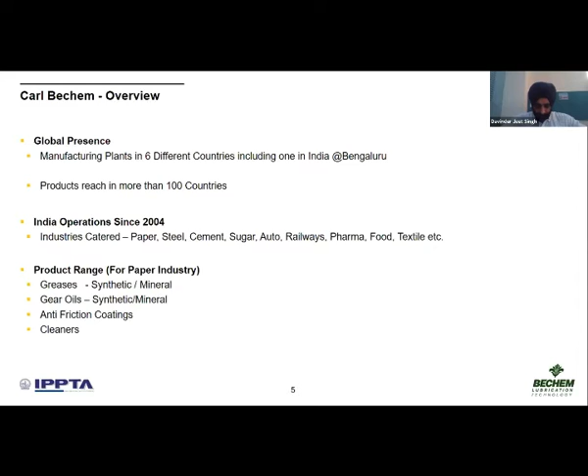The advantage of having Bechem in the plant is that it's German technology made with special German formulations. The additives are all imported, but it's made in Bangalore, sir, at an ISO IATF plant.

We have a pan-India sales network, as you just spoke to one of our distributors. We have distributors located all across India in strategic locations, and trained application engineers. It's not that someone has to come to your plant from a very far away location - generally we have people locally available who can cover the entire movement pan-India.

We strongly believe that there is a tailor-made solution to every industrial problem in the plant.

Our approach, we strongly believe in application engineering, sir. The application engineers conduct lube audits at your plant, which lead to meticulous selection of lubricant, optimizing consumption - right lubricant, right quantity, and right interval. That is the key to any solution in the industry, and it surely helps minimize downtime and optimize the production.

We have a very wide range of greases, around 600 types, so generally we don't have to customize any grease. We'll have a solution for whatever problem you have, with local inventory and timely delivery.

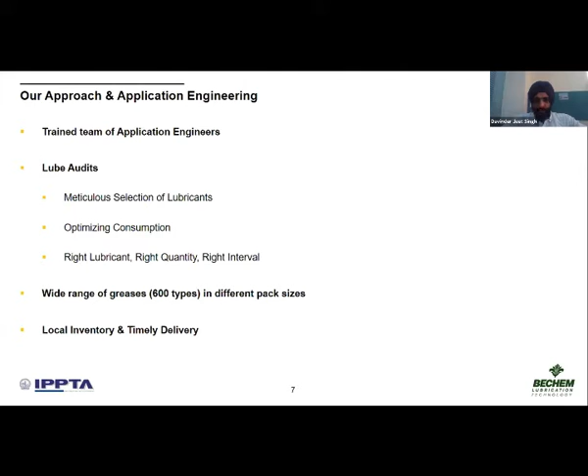Just to give you a brief - sir was mentioning about the moving components in the paper and pulp industry. We have products already selected for most of the applications - water resistant greases, high temperature, heavy load, high speed greases. Anything you need, you will find in the Bechem portfolio.

Just a few glimpses of our plant in Bangalore, sir. We have various lines in Bangalore - lithium, aluminium, urea greases, water miscible. We also have cutting oils and gear oils. If you see the plant, you can observe how the barrels are stacked.

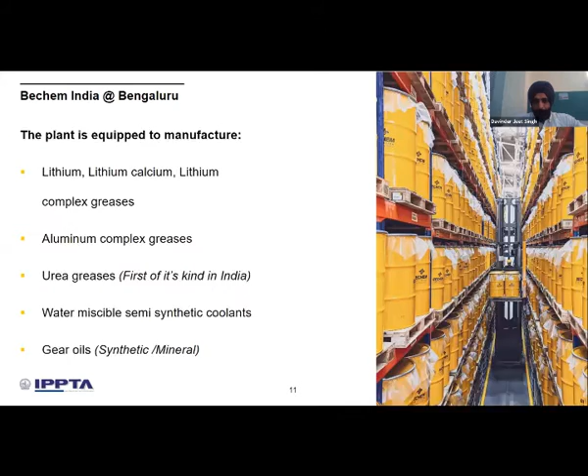Mr. Devinder, nothing is visible to us. Because Hari, sir, you are not sharing the screen or something. No, Hari, we are on the screen of Mr. Harihara and you are speaking. Sir, the same screen - are you not able to see? I'm not able to see, sir. It's very much visible, I can see, sir. Okay, fair enough, please go ahead then.

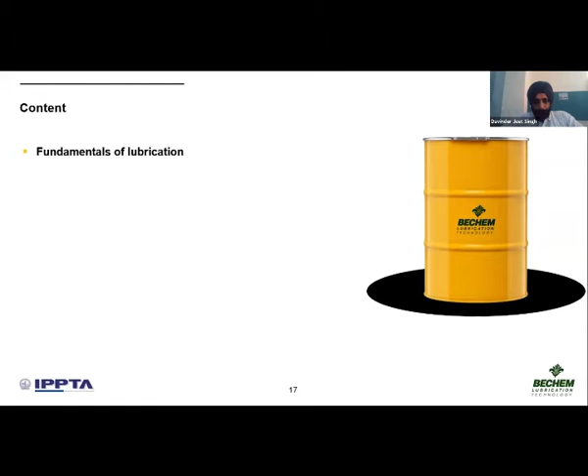So finally we come to the real technical session, and I would take you to the content. That's the yellow gold, as we say. We'll be talking about fundamentals of lubrication, key test methods for greases, and the lubrication practices, whatever we have understood, sir.

Synthetic versus mineral, it's a big debate and probably too small a time today, but we'll give you certain advantages and limitations of both. We have certain case studies, sir - we'll share our experience and probably learn from your comments and views. And the application, other important application areas in the processing plant.

Now I would request sir Mr. Hari to come in with the technical session. We'll begin with fundamentals of lubrication. You have seen he has a very vast experience and he'll probably take us through the fundamentals of lubrication. Hari sir, please. Thank you, Devinder.

Am I audible? Yeah. Thank you, Devinder. Thank you, Goel sir, for this wonderful opportunity, and all the office bearers of IPPTA for making Carl Bechem being associated with you.

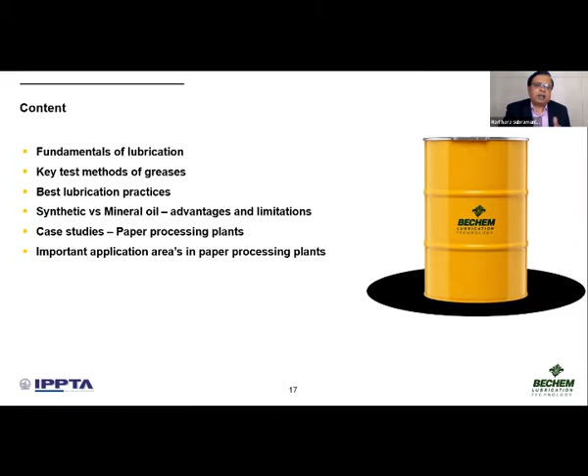Let me begin our presentation on the important fundamental aspects. All of us should know that at any point in time, there are about 50 billion bearings running around the world. In fact, they are the most widespread machine elements in the industry after nuts and bolts. No wonder so many of you experts have joined this technical session on important aspects of lubrication.

Any discussion on lubrication engineering starts with a focused discussion on friction, more specifically about coefficient of friction. Of course, friction is beneficial on many occasions, like brakes, for example. Since we are in the maintenance industry, where we have to take the maximum life of machine parts like bearings, chains, gears, etc., our job is to keep the friction as low as possible. Why? The obvious reason is material loss, wear.

For example, I am holding a ball bearing in my hand. If I don't lubricate it properly, we all know that it will fail in a very short while. But perhaps the most neglected reason for keeping friction as low as possible is the energy losses. I'll use coefficient of friction and COF interchangeably. If the COF is quite high, you will need a larger force to drive this bearing to make it rotate. And that means I am going to lose a lot on energy. So the main reason for reducing friction is to control the material loss and the energy loss.

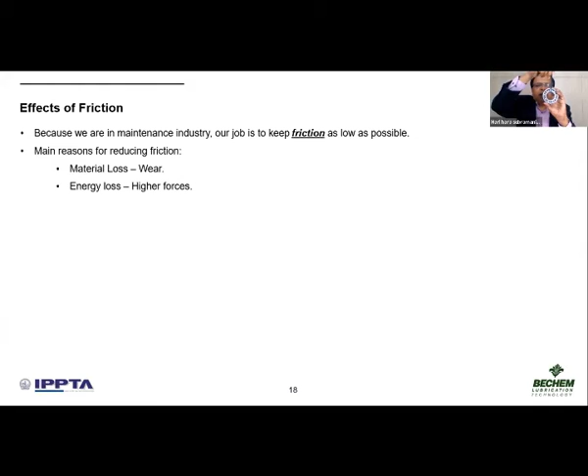Number two, let us assume that I am actually loading this bearing radially in this direction. If there is a pure radial load here, the actual load distribution in a bearing will happen in an arc of about 150 degrees, which means the rolling elements will enter the load zone, participate in the load zone, and then leave the load zone as the bearing is rotating. So kindly remember the second point. Whenever I mention contact zone, it actually means the load zone in the bearing.

Now we will discuss the three main aspects of friction. Please remember, the coefficient of friction in a bearing actually depends on the bearing type and also the size, as well as the speed, load, the quality of lubricant used inside, and the quantity of lubricant used inside. All this will influence the coefficient of friction.

If you take the machinery designer's perspective, as a general rule, they will consider a constant coefficient of friction of 0.0015 for a ball bearing, for example, and for a cylindrical roller bearing, a COF of 0.0011. Even though a cylindrical roller bearing has a line contact, it has a lesser coefficient of friction because of its construction. Similarly, a spherical roller bearing will have a constant coefficient of friction of 0.0018. This is what the machine designer will consider.

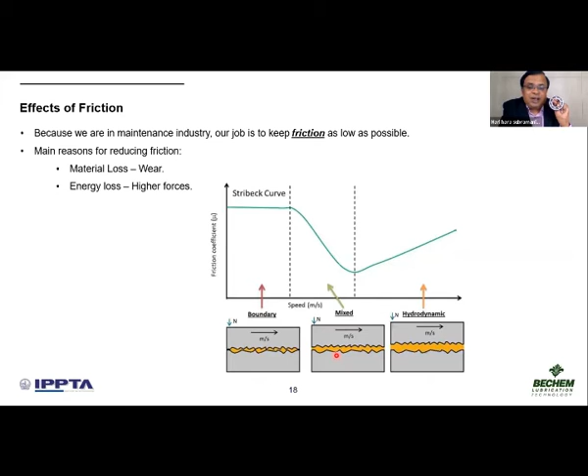Now, why should I know about the mixed friction zone? Any bearing or gears that you see in your industry, where the bearing or the gear has an oscillating motion, which means it begins to pick up speed, the bearing again stops, reverses direction, again starts the rotation, again stops. So this kind of oscillating motion will typically work in the zone of mixed friction. Here again, the lubricant would have successfully formed a lubrication film, but still not sufficient enough to completely separate the friction partners.

Now, as we saw in the Stribeck curve, the primary lubricant role is to separate the friction partners by forming a lubrication film. In the previous slide, we saw the types of friction. Here, we will see the types of lubrication. Please note that the separation of friction partners and load transmission through this lubricating film, for example, in this bearing, happens through a film thickness of about 1.3 microns. Can you believe it? This is almost 23 times lesser than a single human hair. So actually, you cannot see this with your naked eye.

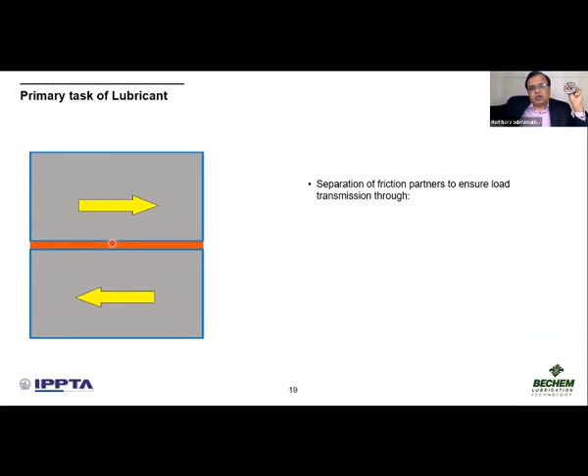And this bearing actually is a 6208 bearing. And this bearing has a dynamic load carrying capacity of almost 3,300 kilograms. So can you imagine the load transmission is actually taking place through just a 1.3 micron thick film, and as large a load as around 3,300 kgs. This is happening through what is called a hydrodynamic film. By hydro, it means oil or fluid, and dynamic because the friction partners are in motion.

We should also understand what is an elasto-hydrodynamic lubrication film. The word elasto only is added here. Due to the tremendous pressure on this 1.5 micron or 1.3 micron thick film, what happens is the balls, when they enter the load zone, they actually elastically deform. Not only the balls, the lubrication film itself, the outer raceway contact zone, inner raceway contact zone, all of them elastically deform until such time they stay in the load zone or contact zone, and then they come back to their normal shape.

In fact, you can assume that the balls will take the shape of an ellipsoid, for example, the shape of an egg in the load zone before it comes out of it. That elastic deformation and the lubrication under that condition is called elasto-hydrodynamic lubrication. All bearings, all gear tooth flanks, cams, all of them are subjected to this phenomenon called elasto-hydrodynamic lubrication film.

In the Stribeck curve, we saw in the boundary friction zone and the mixed friction zone, the lubricant would not have completely separated the friction partners. In that case, additives added to the lubricant have to form a chemically reactive layer on the asperities, which will control friction and wear. So those three are the types of lubrication film that we encounter. So that was the primary task of a lubricant.

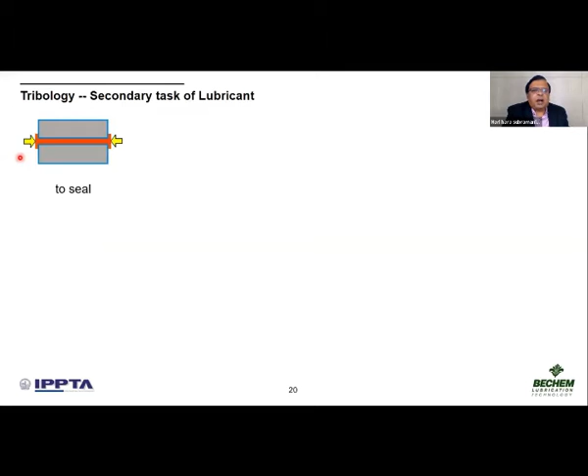What are the secondary tasks? In a paper plant, paper pulp, water, chemicals are very common contaminants. No matter how effective the sealing of the bearing is, these contaminants will somehow find their way through the narrow holes in the sealing system. This contamination is one of the strongest reasons for bearing failure. So not only does the lubricant have to provide a lubricating film, it also has to seal the lubricated part from the harmful influence of these contaminants.

High temperatures, typically in excess of 100 degrees centigrade, will be found in paper plants. Of course, the process-related temperature, like for example, steam used for curing or hot air used for blowing on top of the coating on the paper, these cannot be controlled. Those are proper process parameters. But what can be controlled is the friction-related heat generation inside the bearing. So how efficiently the lubricant can dissipate this friction-generated heat, that means to cool the lubricated area, is a very critical secondary role of a lubricant.

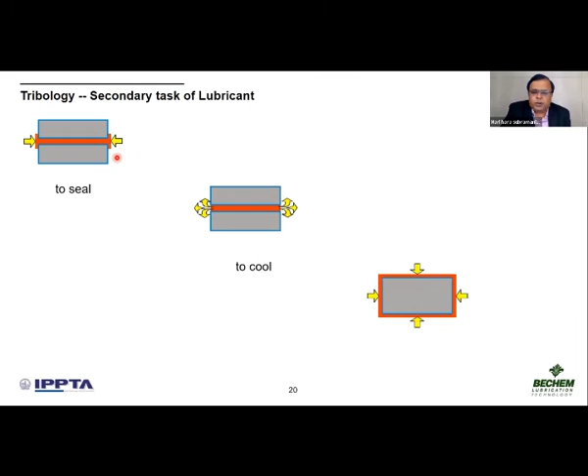Highly acidic and alkaline chemicals, water, solvents are all commonly used in paper plants. And these kinds of contaminants have a very destructive relationship to bearings, in the sense they corrode the bearing and reduce their lifetime. The lubricant actually should act as a shield and protect this lubricated part from corrosion. So those are the secondary tasks of lubrication.

Now, what are the options available for me to lubricate a component? The first obvious option is a grease. As Davinder was mentioning, 600 different grease formulations only in Bechem. In fact, I find it funny when some of my customers say, I have used a very dark purple color grease in my experience, and that grease gave me phenomenal results; probably that customer was not aware. Color in the grease is actually given maybe for identification purposes, and it is basically a dye, maybe for cosmetic reasons. And the second popular option is oils.

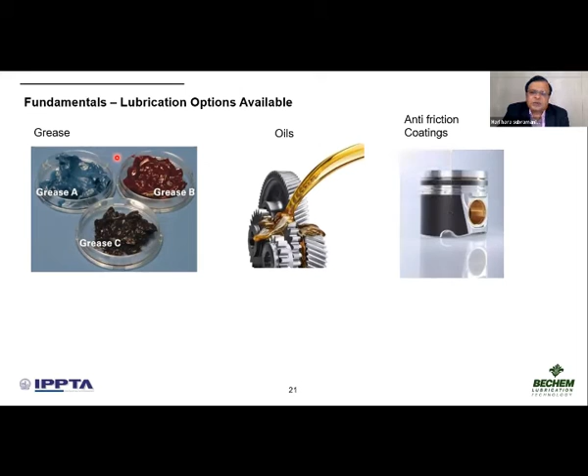For example, gearboxes, hydraulic systems, compressors, engines, transmission gears, all of them are very comfortably and successfully lubricated with oils. There is a marvel technology available, especially for sliding surfaces, not for rotating elements like bearings, called anti-friction coatings. We all know that grease and oil will remain wet throughout their lifetime. But these coatings are liquid while applying, but once they cure, they form a dry film, and this dry film gives lifetime lubrication over a very wide temperature range.

And the fourth and final option available for lubrication is a lubricating paste, especially for fasteners which are exposed to high temperature, for example, the flanges of a boiler. And the second is fasteners which are exposed to a highly corrosive atmosphere.

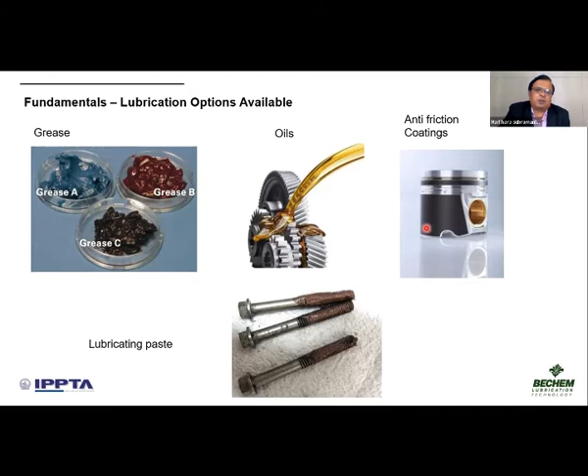Now let us discuss the constituents of grease. Even though the grease looks like a semi-solid substance, 85% of the constituents of a grease is oil. This oil is actually what forms the lubricating film in the bearing. Now, this large quantity of oil is thickened by means of a thickener, which is up to about 10%. The role of a thickener can be assumed like a sponge. When you take a piece of sponge and dip it in oil, it will absorb the oil in its structure, and when it is squeezed under load, it will release the oil for lubrication. So absorption and releasing is the role of the thickener. Not only that, it also helps to retain the oil and the additive package in the applied area.

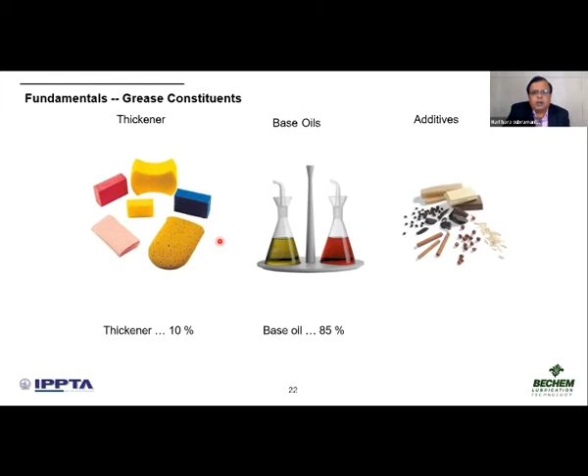Now, the thickener actually determines many performance parameters of the grease. For example, its consistency, its operating temperature range, oil bleeding properties, water resistance properties, and several other parameters are directly influenced by the thickener. Additives are certain chemicals which are added to boost the performance of a grease.

Now, coming to paste, the only difference between paste and a grease is the quantity of oil in the paste is drastically reduced, up to 50%, and about 40% of solid lubricating additives are used. For example, graphite or MoS2 or copper for high temperature applications. So we should understand in a paste, the base oil is actually used as a carrier to deliver the solid lubricants to the required area, like threads of the fasteners, for example.

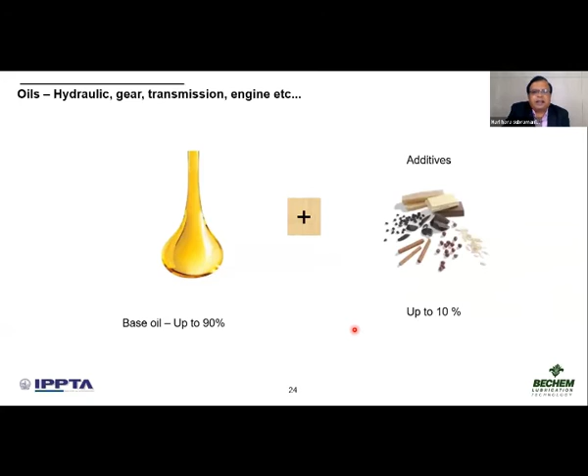Now, in the case of an oil, it is simply the base oil and a host of additives added to it. Now, coming to base oil types, the first popular one is mineral base oil. Especially in India, when we say 20W40 or SAE 90 oil, we mean mineral oil with specific performance properties. They are actually manufactured by refining and hydro-treating crude oils, which are taken from the earth.

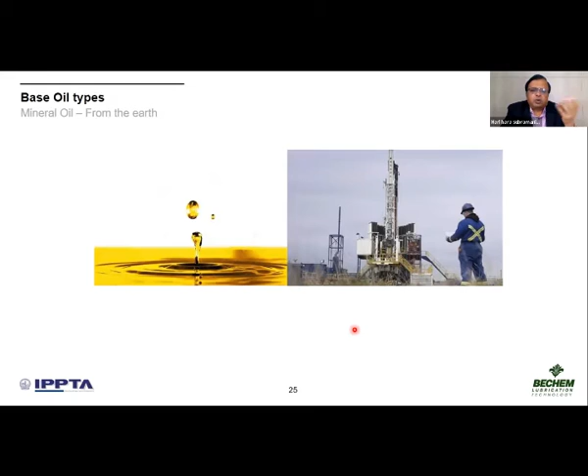Please remember, when I refine the crude oil, a mix of mineral oil comes out. It's never a single quality. For example, naphthenic, paraffinic, olefinic, aromatics, several mixes of mineral oils come out from crude oil. And these raffinates are refined and made more and more pure, for example, by removing waxes, by removing aromatics, by removing sulfur, etc., so that they become a candidate for use in lubricant formulation.

Now, the second variety of oils is synthetic oil. In that, a very popular one is called synthetic polyalphaolefin, which is also called PAO, also referred to in the industry as synthetic hydrocarbon because of the hydrocarbon structure in its backbone. And this oil is very popular, in fact, in the paper industry. For example, in modern paper machines where dryer sections are lubricated with recirculating oil for bearings, the recommendation comes from the OEM for polyalphaolefin oil because of their exceptional oxidation stability. You need not change this oil for some 5 years of running.

They also have a very low traction coefficient, which means the lubricant's internal friction is so low that if they are used in, for example, the gearbox of the paper machine drive rollers, they can result in reduced heat generation of the gearboxes as well as save energy. There are many other synthetic oil types. For example, do you know that all high temperature chain oils are actually formulated with synthetic esters? Polyglycols are another very special type of synthetic oil which has inherent extreme pressure properties. This property is extremely useful, for example, in worm reduction gearboxes, where the sliding percentage is as high as 90%.

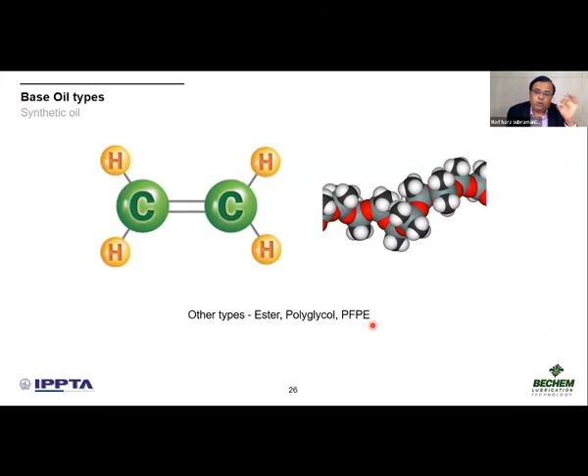And the costliest synthetic oil in the industry is PFPE. This oil is completely inert. No chemical can affect this oil. Not only that, it has some super advantages like super high temperature resistance, radiation resistance, etc. In fact, one of the times when we have celebration among our team is when my team makes our customers realize the properties of PFPE oil and proves the cost-benefit performance of such expensive synthetic oils.

Now coming to the second constituent in a grease, which is the thickener. The most popular is the lithium thickener, which was developed somewhere in the 1930s. The thickener microstructure looks like fibers like this. It is also called lithium soap because the thickener is prepared by a saponification reaction. Now, the thickener we saw will keep the base oil in its structure. This typically happens with the help of van der Waals forces and capillary forces.

There are many other types of metal soap thickeners like aluminum and barium, for example. And if you complex the simple soap thickener with a salt, we call it a complex soap thickener, which is good for structural and temperature resistance. Please remember the fiber length of these thickeners will be between 1 micron and about 100 microns, with a length to diameter ratio between 10 and 100.

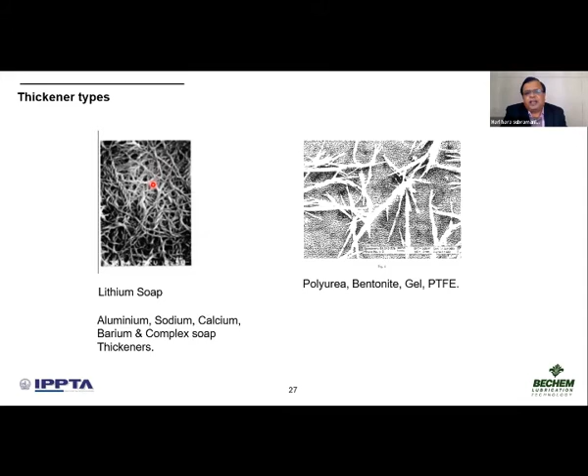In about the 1980s, another family of thickeners was developed, called non-soap thickeners. Popular among them is polyurea. Apart from its several advantages like very good water resistance and high temperature resistance, one unique advantage of polyurea that I would like to highlight here is that it leaves the least amount of residues after its useful lifetime, which means when I apply fresh grease for relubrication in this bearing, almost all the relubrication grease will reach the load zone because the bearing carries the least amount of residues. That is why this thickener technology is becoming very, very popular, especially in the paper industry.

Now, as I was mentioning, there is a host of additives that are added to lubricants, be it oils, greases, or pastes. The primary purpose of adding additives is to eliminate certain undesired properties of the base oil, for example, very high pour point, very poor oxidation stability, or to add additional properties to the base oil, for example, increase its load absorbing capacity, or boost its existing properties like corrosion protection, adhesion, and so on. There are many types of additives, oxidation inhibitors, pour point depressants, and so on. I will focus here on solid lubricants, which are very popular for bearing greases, especially for very moderate or low loads.

Microfine plastic powders called PTFE powders are added as additives to grease, and for medium to very heavy loads, solid lubricating additives like graphite and MoS2 are used in grease formulations. Please remember, the additive content is as low as, let us say, 5% or 3% in many cases.

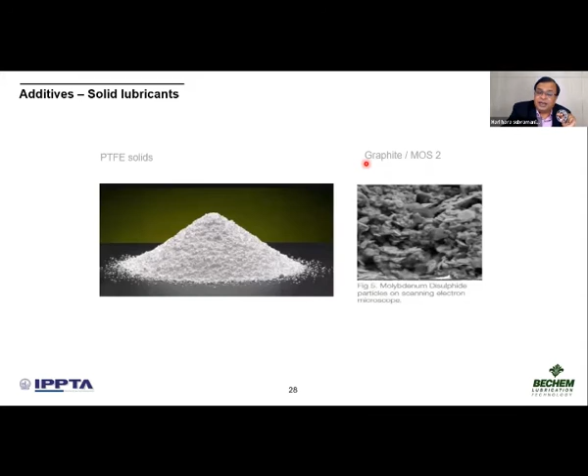Now, moving on to my next section, there are several test parameters that are used to evaluate the quality of greases. In fact, if some of you are fortunate enough to visit the advanced laboratory that we have in Bangalore, you will see hundreds of equipments that are used in testing various type of lubricant formulations. But here I would like to touch upon two very important tests which are relevant to the paper industry.

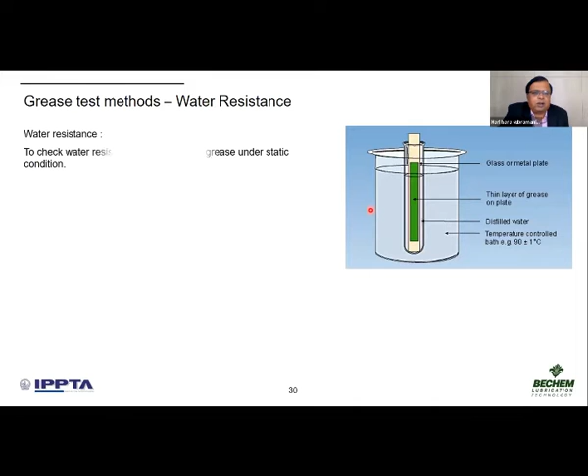The first test is the static water resistance test, which is used for determining the emulsification resistance property of a grease. In this test, a thin glass plate is taken and a thin film of grease is spread on the glass by means of a metal template. This is then put into a test tube and exposed to the test water and also to a heating atmosphere. Typically, here again, water is used. Now, the thickness of the grease film, the cleanliness of the glass surface, the dimensions of the test tube are all specified as per the DIN 51807 standards.

After exposing this to the water for about 3 hours at 90 degrees centigrade, the diffusion or absorption of water in the grease layer and the degree of emulsification of the grease layer is visually evaluated, and then a rating of 0 to 3 is given. A rating of 0 means there is absolutely no change to the grease film, and a rating of 3 means there is a very large change. So the grease that you use in paper plant application, especially in the pulp area or in the paper machine itself, should have a static water resistance of either 0 or 1.

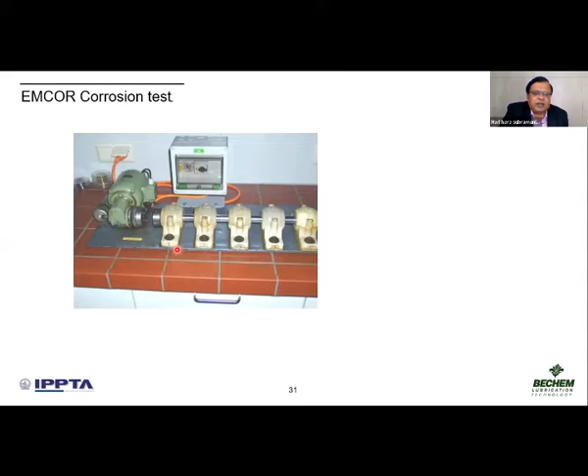The second test that I would like to highlight here is the EMCOR corrosion test, which is devised by the SKF Bearing Company, where swivel bearings, which means self-aligning ball bearings, where you can easily separate the rolling element and inner race from the outer raceway, are used. 10 grams of test grease is applied in each of these bearings, and for a single grease, typically 2 bearings are used. They are assembled on the shaft in this plummer block, and water is added to this plummer block, for example, distilled water or synthetic seawater.

This test involves both dynamic and static testing, which means the shaft will rotate at 80 RPM for, let us say, 8 hours, and then it will stand still for 16 hours, so that we give maximum opportunity for the water which is mixed with the grease to corrode the bearings. So after 1 week, the bearings are taken out and the outer raceways are inspected for corrosion. For example, you see this outer raceway, there is absolutely no corrosion mark in this bearing, which means there is no corrosion, and a rating of 0 will be given. Since we use 2 bearings, typically you will see in the data 0/0.

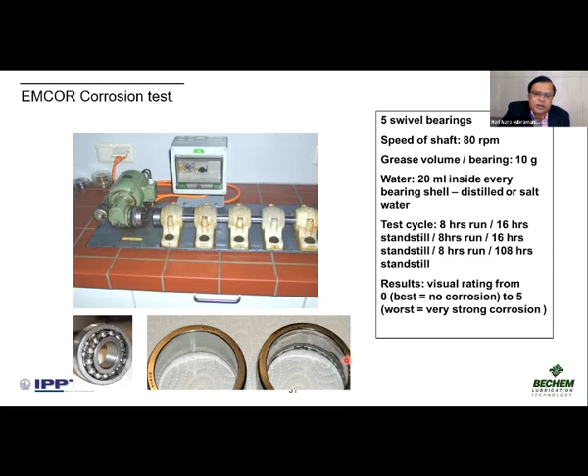Now you see this outer raceway, there is a huge patch of corrosion that is visible in the raceway. So here, this test grease will get a rating of 5. In fact, this is the rating chart. You will be surprised to see, even if the grease gets a rating of 1 in the EMCOR test, the allowed criteria is just 3 spots of corrosion, where the diameter of the rust spots is a maximum of 1 mm. Such are the severe, stringent conditions for this test. So ideally, the grease that you choose for bearing applications in a paper plant should have an EMCOR corrosion resistance of 0 and 0.

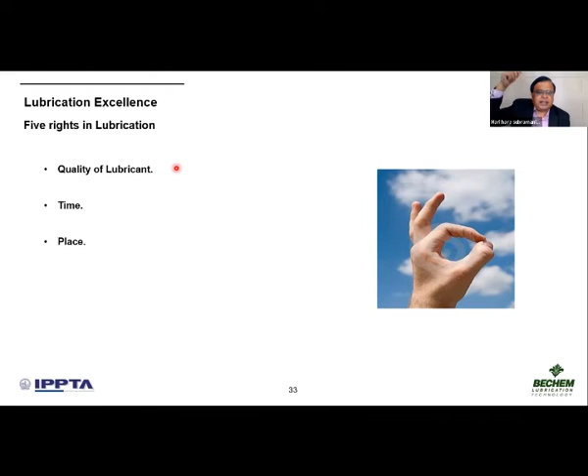Now, Davinder was mentioning lubrication audits. I call it lubrication excellence. If you do 5 things right in the lubrication practice, we say that we are on the path to, or have already achieved, lubrication excellence. What are they? The first one is the quality of the lubricant, which is very, very important. The second is time, the frequency of lubrication, the duration after which you apply a lubricant on the part. The place is equally important. For example, in certain designs of spherical roller bearings, there are 3 lubrication holes in the outer ring. These 3 lubrication holes are given so that when you relubricate, exactly the relubricated quantity of grease will go into the loaded zone.

The maintenance engineer should align the lubrication holes to the lubrication port so that the lubricant flows directly into the lubricated zone. That is an example of 'place'.

Quantity: in my 25 plus years of experience, I have seen maintenance engineers follow the principle of 'more the merrier' - larger quantity you apply, better it is. It is like going to a buffet dinner and eating to your stomach full, and expecting to perform with the same level of agility and fluency. Not possible for a bearing, isn't it? So the right quantity of lubricant is extremely important.

What about the right procedure? All the above four can be correct, but if the procedure of application is not proper - for example, if using a hand lever grease gun, the timing between each stroke of the lever should be 3 to 5 seconds. But if the maintenance technician has an argument with his boss and picks up his grease gun and goes to the machine, he will start applying at high speed. Such high speed action of the hand grease gun lever will put tremendous pressure on the seals of the bearings or housing, causing it to rupture. So procedure of application is equally important.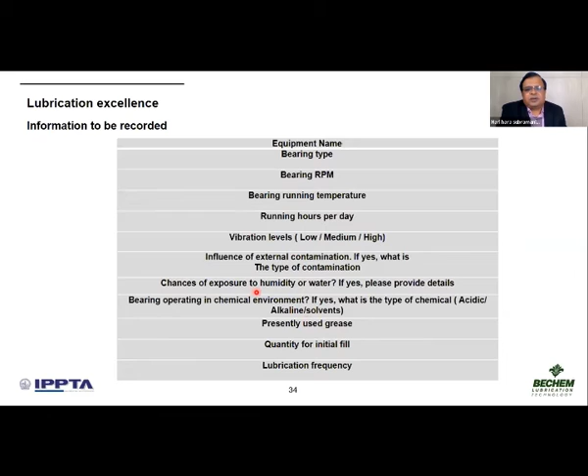For example, we classify equipment based on criticality and collect details such as bearing RPM, bearing running temperature, whether there is a chance of chemical coming in touch with the bearing, what is the current lubrication frequency, what is the top up, what is the current procedure of application, and time taken for changing the bearing.

We collate all this data and analyze it with our technical team, and highlight to the customer's maintenance team what is already happening wonderfully well in terms of lubrication excellence in their plant, and what are the areas where there is scope for improvement in our journey toward lubrication excellence. So if any of you are interested, please let us know.

For example, I will project one of the lubrication charts after our lubrication audit. These are the type of bearings used in the paper machine. Based on the free volume space available for each of these bearings, we calculate using the free volume space formula and arrive at the exact quantity needed for complete lubrication fill.

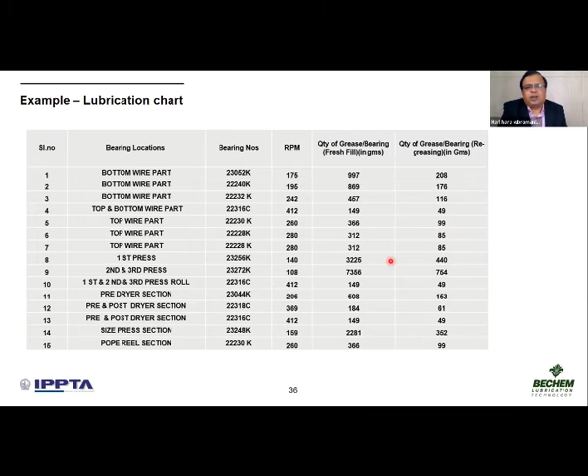Based on the RPM, we either increase or reduce the quantity of lubricant used. Similarly, we use the popular formula of 0.005 into outer diameter into width to arrive at relubrication quantity. Whenever we submit such a chart to our customer, many of them have realized they are currently applying a very large quantity of lubricant for such bearings.

Now, we saw several parameters that we record, but I would like to highlight the importance of just one of those parameters, which is probably the most critical compared to so many others: bearing running temperature. Why is it so important?

Several factors. Number one, the lifetime of the lubricant, which we call oxidation stability, is directly influenced by temperature. This typically follows the Arrhenius behavior, meaning there is an exponential reduction of the lifetime of the grease when temperature increases.

Second reason: there can be a loss in consistency, and the lubricant can bleed oil excessively when exposed to high temperature. Every lubricant manufacturer declares a temperature window within which a grease can perform most effectively. So if I don't control or select the lubricant based on this operating temperature window, I will not get optimum performance from the lubricant. That is the third reason.

The fourth reason: the lubricating grease builds up a thicker lubricating film, but over time, as the bearing rotates, starvation is bound to occur, meaning the thickener system has to continuously feed base oil for lubrication. But if I don't control the friction-related temperature of a bearing, and it shoots up to a higher temperature, there will be excessive base oil evaporation from the thickener system. So the thickener does not have adequate base oil to feed the starving bearing, and that can result in bearing failure.

Many other causes can happen just with this parameter, so please ensure that the running temperature of bearings in your plant is very regularly monitored. Please ensure the same person can monitor it, preferably, but sometimes it's not possible.

Please mark a red dot paint on the component, and whoever measures temperature should exactly measure it at that spot. Along with the running temperature, ambient temperature should also be recorded, because ambient temperature directly influences the running temperature of the part.

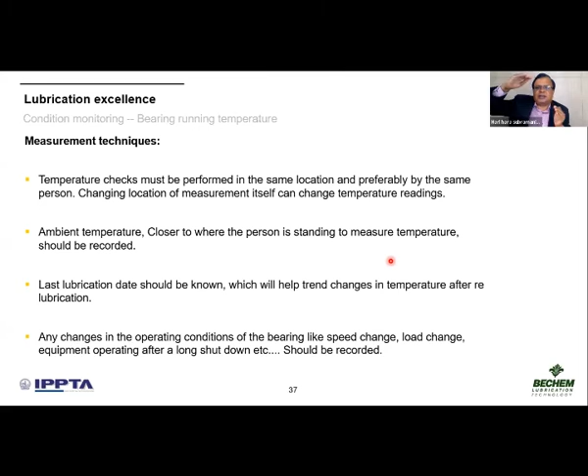Whenever you apply fresh grease to a bearing, it will take time to redistribute itself by getting churned and kneaded together. So in the initial period after relubrication, there will be a spike in temperature, but it will reduce and optimize to an equilibrium bearing temperature.

Every time a bearing runs less than 70 degrees or 82 degrees, it is in good condition. But if the same bearing moves to 93 or to 121, then there is a cause of concern for us.

Typically, when the temperature crosses about 120 degrees, it's preferable to use a C4 clearance bearing so that we accommodate for the thermal expansion. And if the temperature crosses 150 degrees centigrade, we can be sure that the bearing is traveling towards failure.

How do we control the friction-related heat generation? You have to limit the number of startups and shutdowns if possible, or you have to control the variations of load and speed as much as possible.

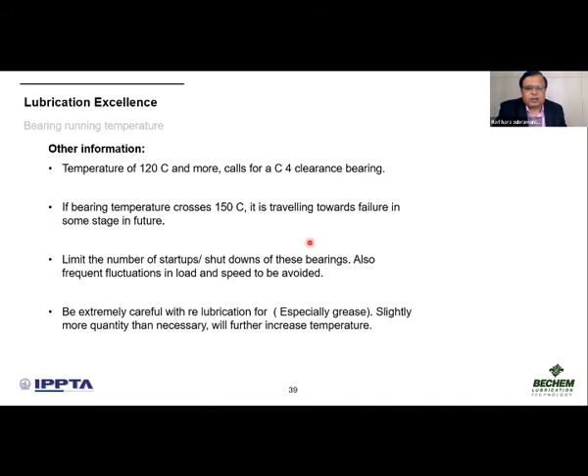Now this is my last slide for my portion, with the very famous 15-degree rule. This rule says that for every 15 degrees centigrade rise in the bearing's running temperature, the lubricating grease's life—not the bearing's life, the lubricating grease's life—reduces by 50%.

For example, if a bearing runs at 70 degrees and the OEM has recommended relubrication at 1000 hours, but the same bearing runs at 85 degrees because of any of the 5 reasons I mentioned, the lubricating grease's life will reduce to 500 hours. So that is the importance of running temperature of the bearing.

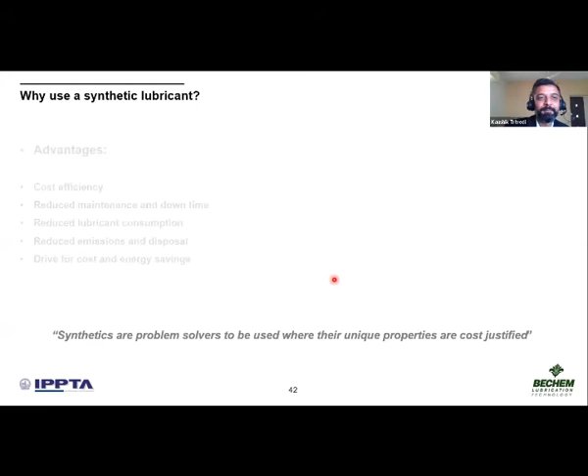We'll start with the long pending argument of synthetic versus mineral. So Hari sir, next please. Yeah, yes sir, right sir.

Actually, we should look at synthetic lubricants as problem solvers, to be used where their unique properties are cost justified. This is one of the closest definitions of the application of synthetic lubricants we can come across. So it is more a question of why and when to use synthetic lubricants.

We are here to share some of the advantages and limitations very briefly. The first advantage is cost efficiency. At the same time, it is a disadvantage in terms of higher cost as well. But if you look at the longer interval or duration of time for synthetic lubricants, we'll see in the case studies that it offers excellent cost efficiency.

Synthetic also offers reduced maintenance and downtime. Overall lubricant consumption can go down with the use of synthetic lubricants, limited emissions and disposables, and also cost and energy savings. As rightly mentioned by Hari sir in the fundamentals, synthetic oils like PAO offer a very low traction coefficient, which can be a key point for energy savings in the paper industry. So these are the few advantages.

If we look at the limitations with respect to synthetic lubricants, they are generally 3 to 5 times costlier compared to standard mineral oils and conventional lubricants. Also, synthetics have very limited compatibility when it comes to sealing material.

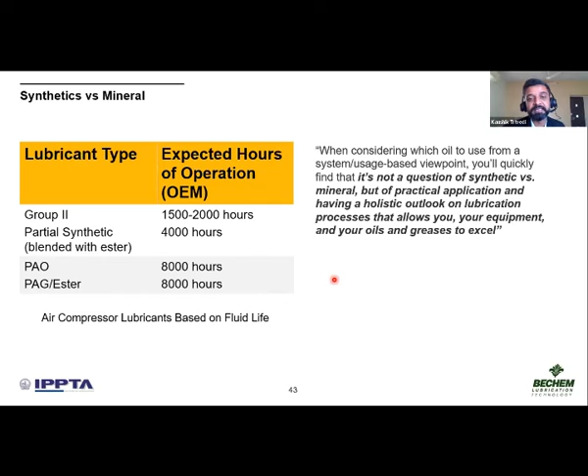So it's more about where synthetics are suitable and where mineral oils are the right application area. Now we will look at a couple of applications and opportunities most suitable for synthetic lubricants.

First and foremost is OEM recommended products. There are gearboxes and bearings where OEMs themselves study the application requirements and recommend a synthetic product range. The second would be extreme temperature conditions.

As Hari sir mentioned in his last couple of slides, when the temperature shoots up above 100 degrees Celsius or so, that calls for the use of synthetic lubricants. Very high load, very high speed, and very low speed applications also apply, sir. As we've seen in the basics, even at very low speed conditions, boundary friction happens, so that sort of application demands synthetic lubricants.

Very short oil drain intervals, like when we have to change mineral oils very frequently, is overall not a very advisable application area. Here we can use synthetic oils and extend the lubrication intervals or oil drain intervals by a minimum of 4 times. So that can be one more application where synthetics can be used.

And for bearing lubrication with shorter regreasing intervals, we've seen in our work with the paper industry that there are areas where very frequent regreasing is done. In those areas, the right sort of lubricants can probably extend the lubrication intervals, and we can use synthetic lubricants in those applications.

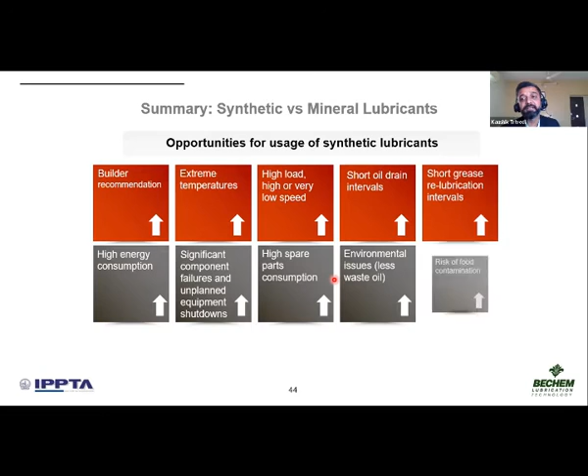Also, one more industry that can surely benefit from synthetic lubricants is the food processing industry, because there's always a risk of food contaminants -- the end product could get contaminated with mineral oil based products. So the food processing industry is almost 100% using synthetic based NSF-H1 certified lubricants. Those are the major opportunities and application areas where synthetics can be useful.

And there are also applications where mineral oils can do justice as well. So very briefly, we've covered synthetic versus mineral.

Now we will move on to the case studies part. We are majorly covering 3 case studies here, sir. One is the wet end area in paper machines, second is the dryer gearboxes in paper machines, and third is hot air fan bearings with high temperature and high speed applications.

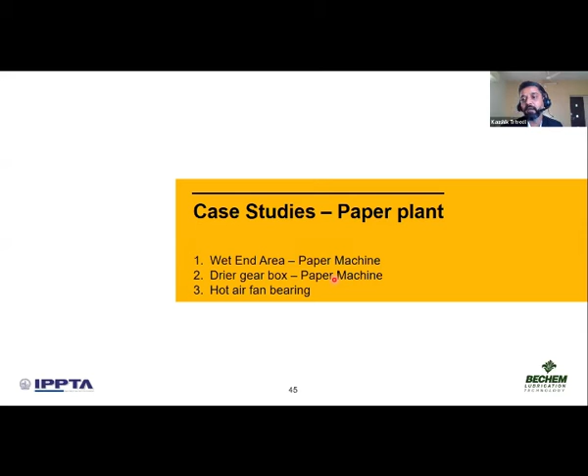So why case studies? Based on our experience working with a variety of industries, applications, and customers, we found that case studies are the most effective way to share our work and knowledge. It's very easy to understand and very relevant for the audience, which is why we are sharing the case studies here, sir.

So first is for the wet end area in the paper machines. Yeah, next, sir. Right, sir. Thank you.

So actually, Sanjay sir also started with that. There are so many parts in the pulp and paper industry. Just to give you an idea, it's very interesting to note that the various sections of a paper machine itself are exposed to close to 1,500 bearings, different bearings, and to very harsh conditions, which include water, steam, heat, and paper dust as well. And each section of this paper machine has its own special lubrication requirements to take care of.

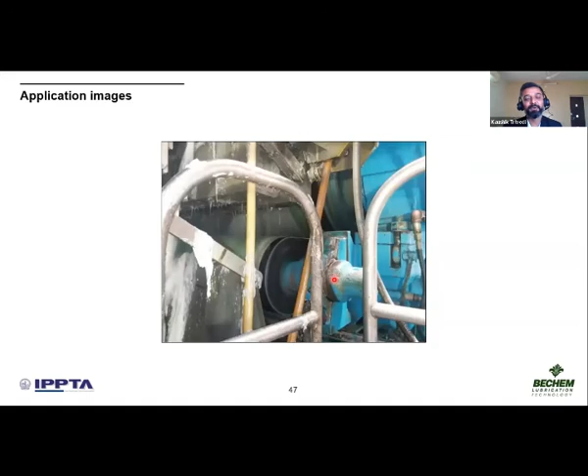So first and foremost we'll start with the heart of paper processing, which is the paper machine, and paper machine wet end area bearing lubrication, the most common and most affected area. We can clearly see the water coming in on the lubrication part, or probably the bearing part. It's one of the most challenging applications. This is a very familiar picture of a press felt assembly. You can clearly see it day in, day out.

The major challenges for any lubricant or any grease to work in this particular application, we could find three major challenges. First is a water resistant grease requirement. That means not only normal water, but very high pH chemically treated water. So any lubricant needs to be very strong and very effective in water resistance. Also it needs to provide excellent corrosion protection against moisture and water.

And third and the most important challenge is the load carrying capacity of any lubricant. Once you have all three key inputs, probably we have a wonderful product to take care of these applications. Now we'll go to the case study, sir. We have collected the basic application details, as we have seen in the earlier slides of Hari sir as well. We collect all the data whenever it's possible.

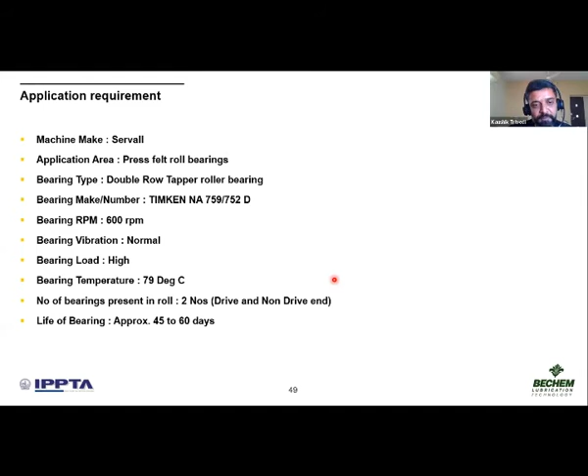This is a Servall-make machine. The application area is the press felt roll bearings. It's Timken-make double row taper roller bearings with 600 RPM, sir. Vibrations were normal. Load in this section of the paper machine is generally very high. The running temperature of the bearing was 79 degrees Celsius, and there are two bearings, one each in drive and non-drive end. The concern was the life of the bearing. Approximately 45 to 60 days of life the customer was able to get out of this application.

The lubricant used was a conventional competition grease. The greasing practice was every 15 days. We have seen that very frequent greasing is very normal practice. So people used to grease very frequently and more. And the machine is subjected to chemically treated water ingression consistently. Also, based on the bearing number, we were able to collect all the relevant information on the bearing parameters like OD, ID, width and weight. So based on all these parameters, next sir.

Based on all these parameters and the interaction with the customer, we could point out a couple of areas of improvement. First and foremost was the premature bearing failures. Second, because of the bearing failures, unplanned maintenance, shutdowns, downtimes, production losses, and frequent greasing with excessive consumption. This is a typical case of excess lubrication. And because the grease in use was not designed for such water resistance and corrosion protection, it had very poor water repellent and corrosion prevention properties. So these were the key areas where we can work with the customer. Next, sir.

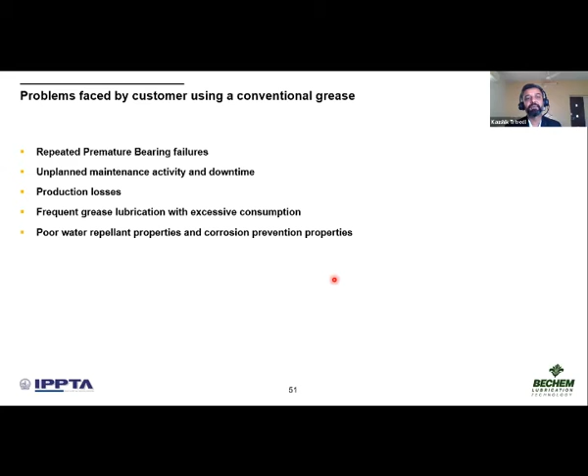Our choice of product was High-Lub FA 67-400. This is one of the greases from our range. It has one of the best water resistances. One of the tests we have seen in Hari sir's slides is static water resistance, and this particular product is 1 rated, and it has one of the best thickener chemistries, lithium calcium, inherently having the property of water resistance. This product is excellent in corrosion protection, and it prevents the bearing from any sort of rust formation when exposed to water and moisture. It has wonderful corrosion test results of 0 and 0. So it is one of the products to go for in such water resistance applications.

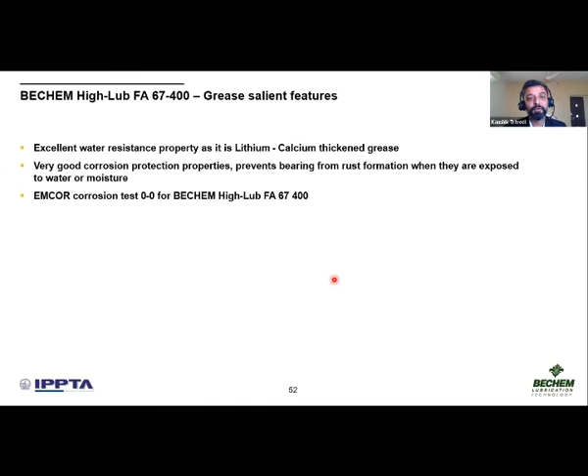Apart from all this, this particular product has a very high base oil viscosity of 400 cSt, an ideal candidate for slow speed applications where boundary friction can happen, which ensures better lubricating film formation in the friction zones during operation as well. And this particular product has 2 different sorts of additive package.

One is anti-wear additives, which ensures no wear and tear during any sort of sudden or impact loads, and also it has extreme pressure additives. Next, sir. Extreme pressure additives are present there to take care of heavy loads. And this is particularly an ultra purified mineral oil based product, which ensures longer durations of service and also helps us in terms of extending the lubrication interval in the bearings.

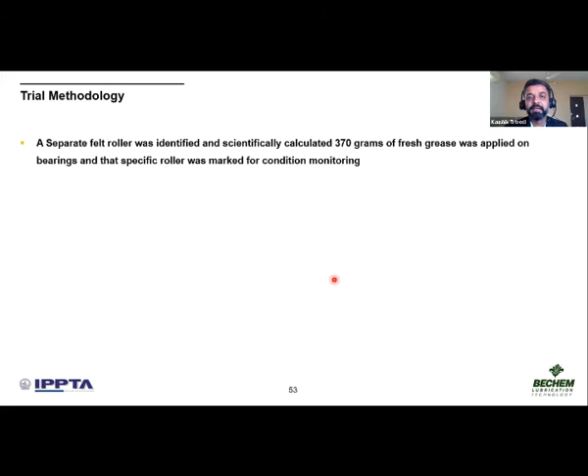Okay, so this was the selection process, and we could finalize on this particular product. We have gone to the trial now. We identified a separate felt roller, and based on the data on the bearings and the operational parameters of the applications, we have calculated 370 grams based on the free volumes available. 370 grams of grease is the required grease for the first fill applications.

And because it's a water resistance application with high load and running in critical conditions, 370 grams was identified. We also make sure that there should not be any sort of grease dumping, because generally we have seen that in the housing area our team usually dumps a lot of grease. So just to avoid that, we have made sure of that. Yes, sir.

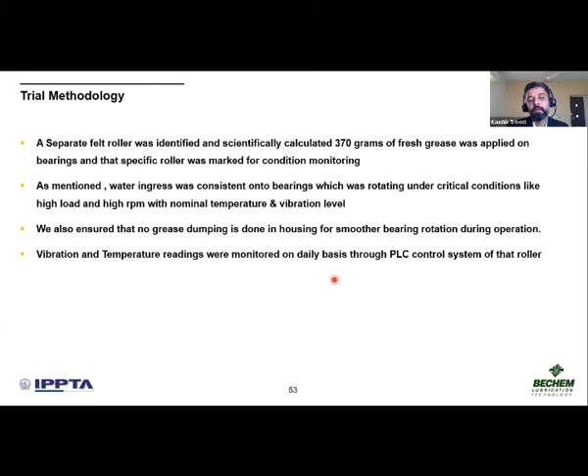Vibration and temperature readings were monitored on a daily basis to ensure that there should not be any sort of bearing failure or any catastrophic failures. Grease consumption was not quantified earlier. There is a practice of putting "zyada acha hai", as Hari sir says probably. So there has been a practice of putting more, and excess lubrication was followed. We have tried to cut it down, as it ultimately resulted in temperature rise and failures. So we have fixed the regreasing quantity at 100 grams.

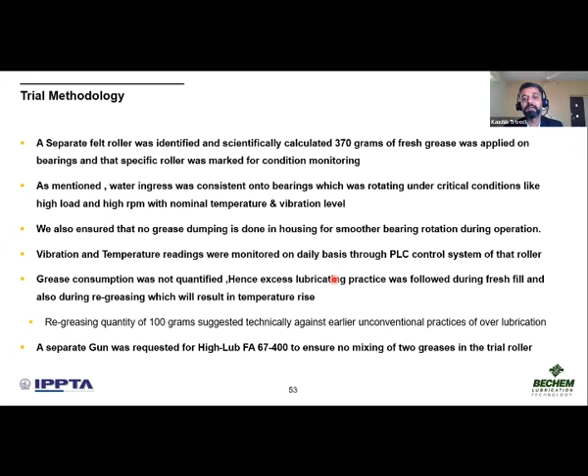We also made sure that there should be 2 separate grease guns. It is also not ideal to mix 2 greases together. So we have made sure that 2 separate grease guns are allocated, and with our product we avoid mixing with any other greases. So this is the overall methodology we follow. Yes, sir. This is a typical assembly line where we always want to be with the customer on the shop floor, and we can clearly see here the grease was quantified and then put in the bearings. Yes, sir.

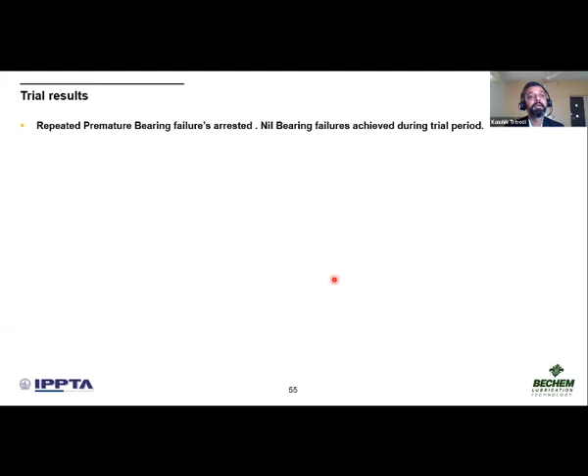The test results were quite encouraging for us and the customer both. We arrested the premature bearing failures very well. There were no bearing failures reported during the entire period. Temperature reduction was also observed throughout the trial, and we were also able to extend the lubrication frequency from 15 days to 30 days, so it's almost doubling the life cycle. Vibration patterns also showed absolutely no issues with the extension of lubrication and grease changeover. Cost saving was achieved with respect to increased spare parts life and reduced downtime.

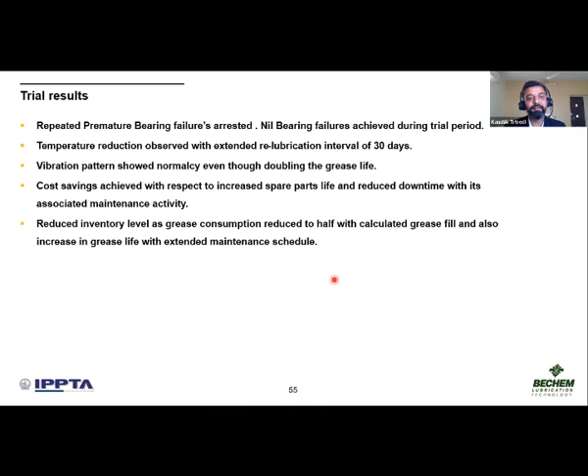So that is one of the major achievements for us, because generally it is seen that when we go for specialty lubricants or any good product, we have to incur some extra cost. On the contrary, here with the right product, the right methods, and following the 5 rights of lubrication, we were able to achieve this cost saving, increase spare parts life and reduce downtime. Yes, sir. The inventory level of grease has also gone down because we have now calculated the quantity for the first fill and the regreasing as well. So it has gone down by more than 50%.

Apart from this particular felt roll, we have a possibility of replicating the same product in all the water resistance or water ingress areas like wire part, mold area, screening bearings, mixers and refiner bearings. So this is one product which can be used across the water resistance area where we can benefit.

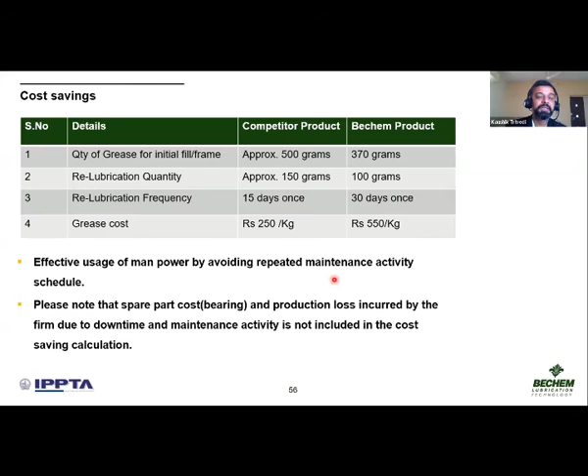And with this simple small mill, actually one machine, we could achieve almost 11,000 rupees of direct cost saving with the lubricant itself. So this is just to give you an idea about the cost saving part. Yes, sir. Thank you. This was all about the case studies about the water resistance area.

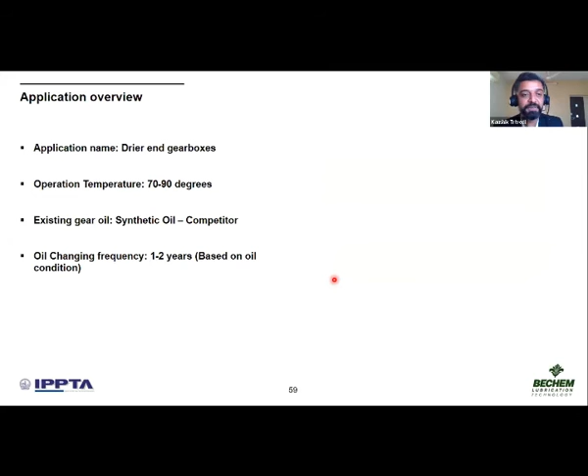Now we'll move to the paper machine dryer gearboxes. We have seen that this is one of the candidates for synthetic lubricants. So this is a dryer end gearbox. The operational temperature of that gearbox is close to 70-90 degrees Celsius. Synthetic oil was in use from the competition, with oil changing frequency close to 1 to 2 years based on the oil conditions.

But here also we can note that the overall temperature of the application area was 70 to 90, but the radiation temperature on the felt roll was close to 110 degrees Celsius. So it's a definite synthetic oil application. Based on the details we collected, we recommended our PAO based 320 viscosity gear oil here.

All the properties are generally at par with the other products, but one of the key test results or properties, as we have seen in the greases like water resistance and 4-ball weld load, probably one of the key properties for any gear oil is the FZG load stage. Okay, so just wanted to briefly share what this is all about.

FZG is basically a technical institute for the study of gear and drive mechanisms, and this test is actually to determine the extent to which the gear lubricant helps to prevent scuffing on the tooth faces. In this typical test, with a peripheral speed of 8.3 and oil sump temperature of 90, the gears run at lower load stages initially.

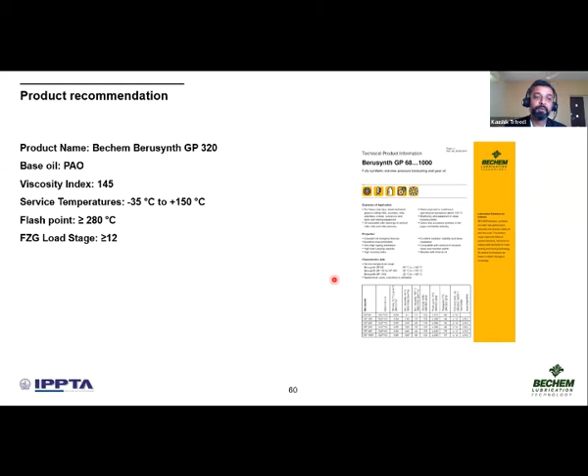Then gradually the load stages are increased up to a level, and the load stage increase leads to higher flash temperatures in the gears. Up to 12 stages generally the test is carried out by the institute, and we have a wonderful product for this application which has a greater than 12 result. So what is the significance of this stage test, we will see in the performance of the product. Next.

Trial initiation. Here we have identified 4 dryer end gearboxes. The sump capacity varies from 2.5 and can go up to 60 liters. So we have identified 4 and we have started our trial. For trial monitoring, periodically we have done physical visits, temperature monitoring, vibration analysis. We also collected oil samples at various times.

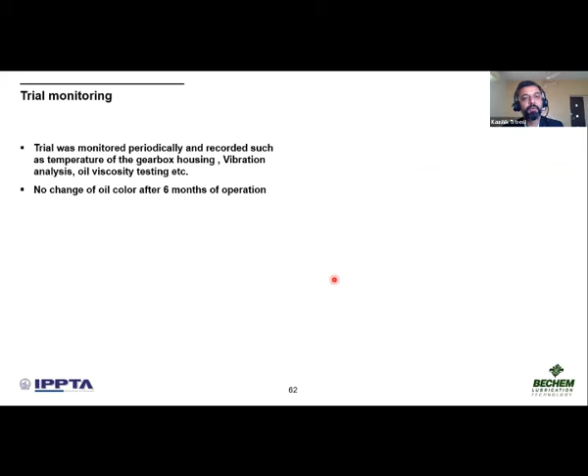We could observe that after 6 months, there was absolutely no change in the oil color. So the trial was going in the right direction. Yes, sir. Next, sir.

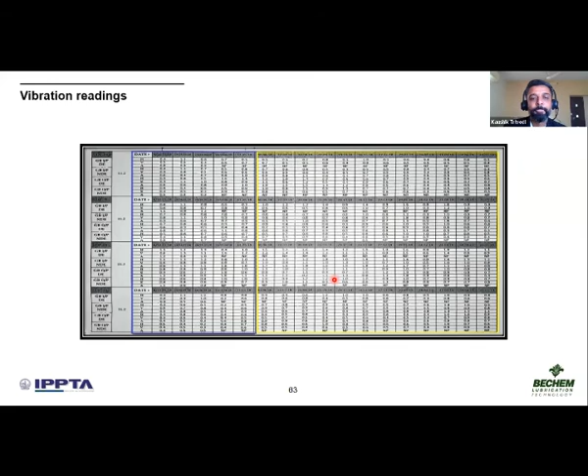Vibration readings, we were able to monitor. Anytime, the customer's support and help is very much required, so here also we had wonderful support from the team. This is the entire year's vibration analysis. We could see that the earlier performance and the Berusynth GP performance was at par in terms of vibrations as well. Next, sir. Next.

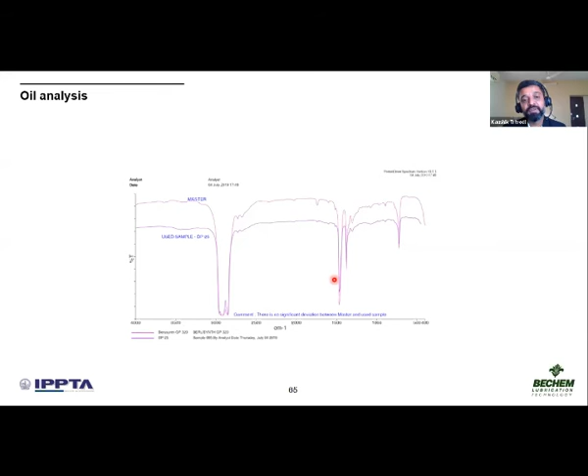We have used the master IR chart and used oil samples, and in this also there is no significant change or deviation we could find in terms of any degradation or contamination. Next, sir.

To conclude this trial, the trial ran for almost 30 months. Yes, sir, please. We found there is no change in the temperature and vibration readings. Only a slight color change we could observe after 20 months, 24 months of continuous operations, which showcases the exceptional oxidation stability of the oil. Okay, which is evident that the base oil and additives and the overall combination of the product is great.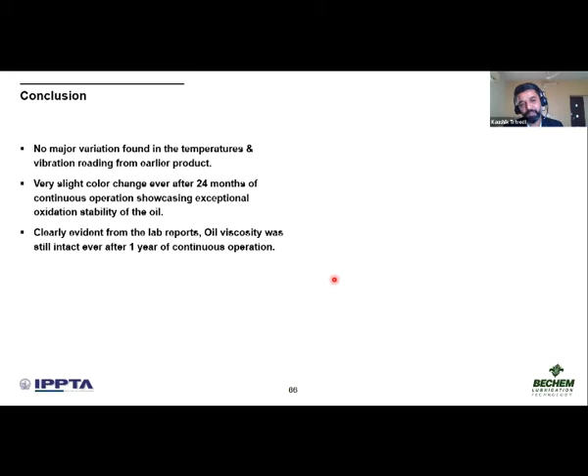And with the support of our lab, we found that after 1 year or maybe 14 months of running also, the oil viscosity was still intact. And that particular gearbox has run for almost 30 months, 2 years and 6 months, without any oil change. So this is one of the very good performances of any gear oil in such a demanding application.

Yeah, thank you, sir. So now the last case study from my side, and then probably Davinder sir will come in. Hot air fan bearings with the synthetic greases. This is one of the high temperature, high speed applications. So I'll just go through it. There are total 9 hot air fans in paper machines: pre-MG supply, post-MG supply, post size, backcoat, pre-coat, backcoat supply, top coat, and IR dryer. I'll just go to the application details.

As usual, once we understand and identify any applications wherein an improvement area is there and we can support the customers, we generally ask for a lubrication audit possibility. So we studied the application area. This is particular to the backcoat supply fan. It was a spherical roller bearing. The interesting part was that at the non-drive end, the temperature was close to 100 degrees Celsius, 90 to 100 degrees Celsius. And the RPM is 2,870.

The grease in use was a very good grease, PTFE grease. The grease quantity being used was approximately 200 grams every 7 days. And the major area of improvement was the grease was dripping from the bearing, frequent bearing failures, and abnormal rise in the bearing temperatures.

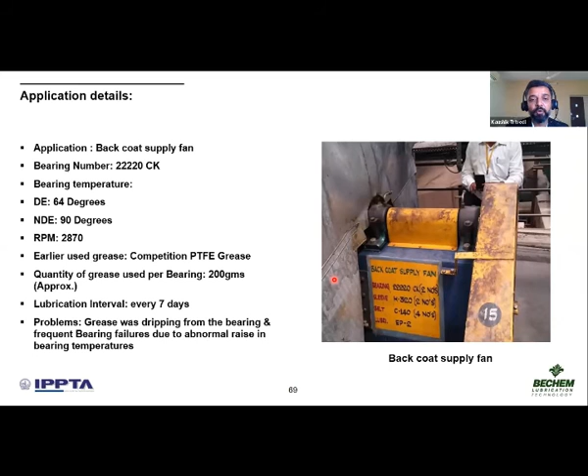We studied the application area completely. Once we understood that there is a major issue with the lubrication failure in the plummer blocks, we submitted our detailed technical proposals with quantity of grease to be used, regreasing frequency, and product recommendations, and we convinced the customer for a proper in-house trial so that we can prove we add some value in these applications and can arrest the bearing failures. Yes, sir.

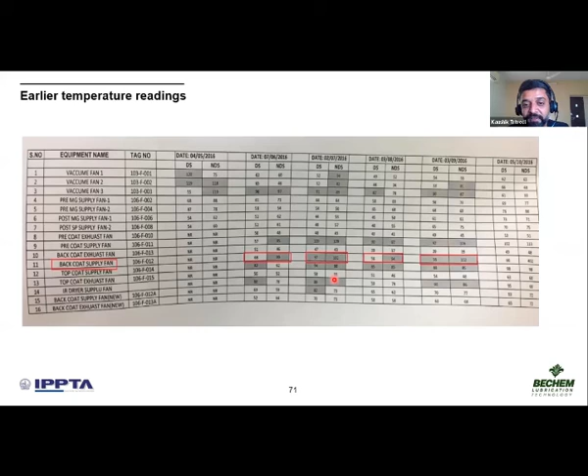These are the temperature readings for your ready reference. We can clearly see that on the non-drive end, the temperature is close to 100, in some cases it's 102 as well. So we can note it down. Yeah.

Exactly 42 grams of grease was measured, weighed, and then put in the 2 new bearings, both drive end and non-drive end. We also made sure during the filling that the grease is applied manually on the entire bearing and all the rollers are lubricated properly. We are very fortunate to have such customers who allow us to work together. So both drive end and non-drive end bearings are lubricated properly, ensuring no gaps on any rollers are left behind.

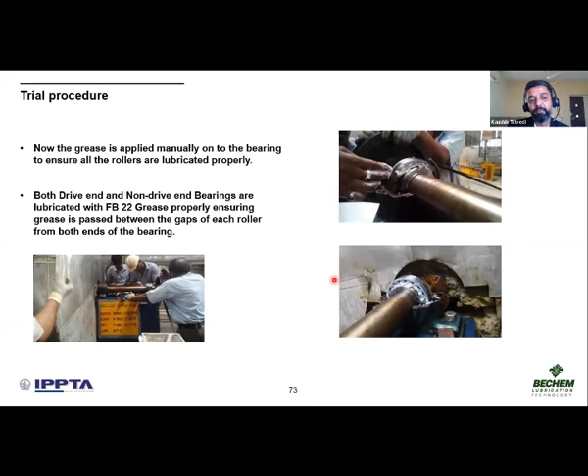Yes, sir. The trial monitoring, as usual, has been done with the support of the customer. We monitored the trial for almost 15 days continuously. Every 3 hours, we took the temperature readings, because temperature is a very early indicator of any lubricant performance. And clearly we can see the maximum temperature on the non-drive side was 67 degrees Celsius, which is almost a 30 degree reduction in temperature. Yes, sir.

So based on overall performance, the customer found that there is a huge reduction in bearing temperature, close to 30 degrees Celsius minimum, and we were able to extend the lubrication interval from 7 days to 45 days, and that too without any bearing failures. Okay, that's tremendous.

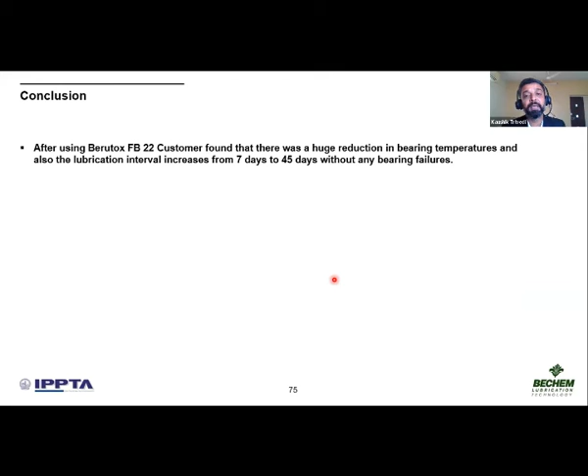This particular product has also proved to be a very cost-effective solution, because of the 200 grams to 42 grams in terms of lubrication quantity consumption, and from 7 days to 45 days. So extension of lubrication intervals, and that too without any bearing failure. So overall, despite being almost 4.5 times costlier than the earlier grease, we are able to prove it, and the customer is also able to understand that. They also encourage us to go for that benefit of cost and benefit of the right product with this particular product. Almost all the 9 fans are now running with this particular product at the customer end.

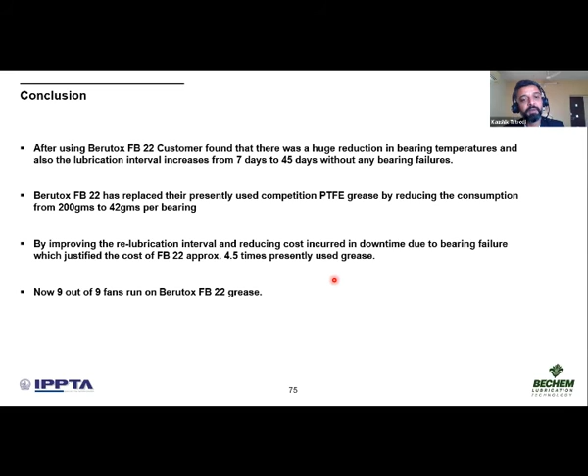So with that, probably I'll stop here, and before I move forward with Davinder sir's last section of the presentation, once again I would like to reiterate the 5 rights in lubrication excellence: right quality, right quantity, right time, right place, right procedure. And if we work with the 5 rights, probably we will be a step closer to achieving lubrication excellence, and we will be there to support you in achieving lubrication excellence.

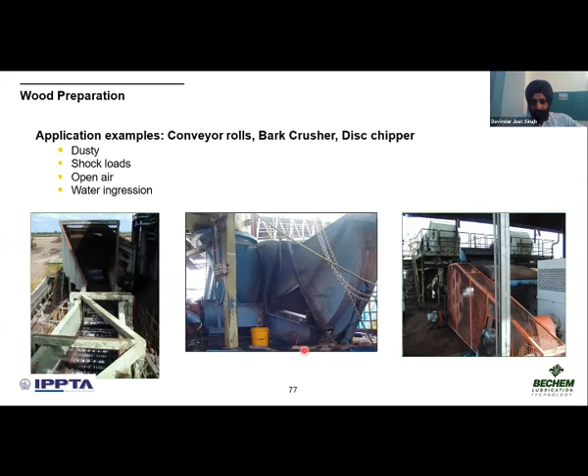And then comes the recovery plant. You have big open gears, sir, in the kiln. We have girth gear lubricants specially designed for the same. We cater to a large number of girth gears in other industries also; big cement plants are our customers. And we do have expertise in handling girth gears. We have a special team also which can handle the girth gears.